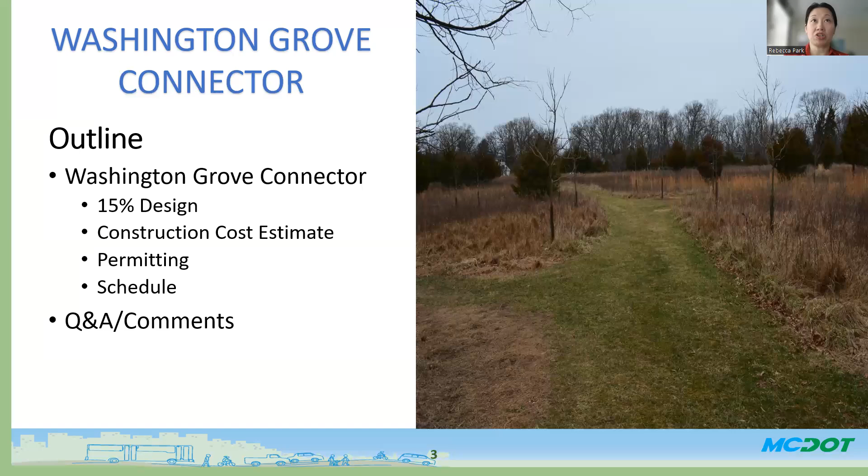That said, here is the outline of tonight's presentation. Mr. Moyasser Mohammed of Shalaria will walk you through the 15% design of the bike trail in detail. Then I will brief you on the construction cost estimate, followed by permitting and project schedule. Then we'll take questions and comments at the end. So now I'll turn it over to Moyasser for the 15% design for the bike trail.

Thank you, Rebecca. I appreciate you. Good evening, everyone. This is Moyasser Mohammed, civil engineer in Shalaria Associates, the project designer and engineer of record for Crabbs Branch Washington Grove Connector Project. And as Rebecca explained, this is the 15% design, and we have here two concepts. One going from Crabbs Branch to Brown Street. As you can see, it's highlighted yellow in the slides here. And that is for bike only, the road is not included.

And here you can see at the bottom, there's two cross sections that show you the 10 feet wide trail, bike and pedestrian. And to the side, there is 2 feet of buffer. So the total width of the trail is 14 feet. The trail is going to have traditional hot mix asphalt pavement with cross slope, combined with porous asphalt with under drain piping for the stormwater management concept, a preliminary concept that we're going to evolve and develop. Next slide, please.

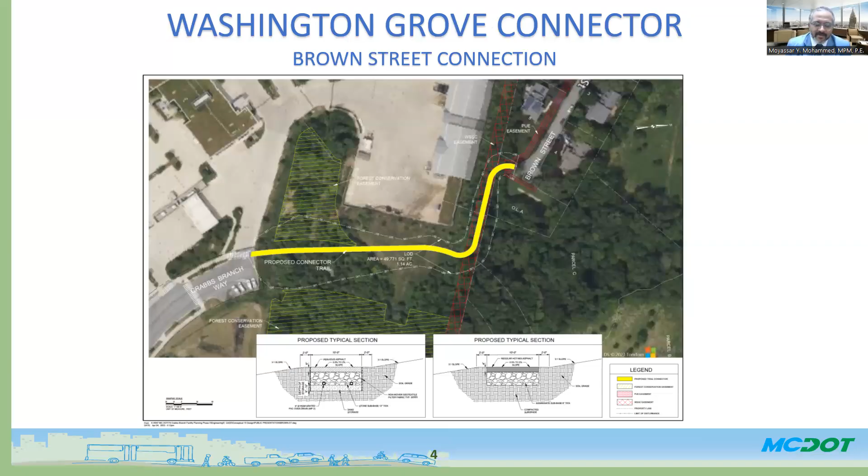As you can see here, this is the site plan for the Crabbs Branch Trail from Crabbs to Brown, and that portion is from the center of Crabbs Branch to the end of Brown Street. And in the top, you see the trail center line with alignment and the grading to the left and right sides as slope.

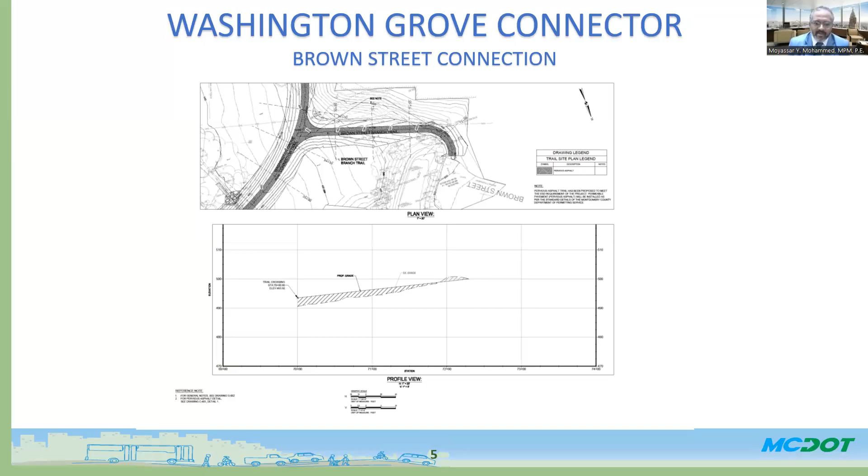And at the bottom, that's the profile, where it shows the majority of that portion of the trail is fill. So we're filling like 5 feet. And when it comes to Brown, there's a short portion of cutting, like 3 feet. So we can have a level, well sloped and smooth trail. Next slide, please.

This is the second concept, which is the full design, the full trail from Crabbs Branch all the way to Amity, including Brown, and it's also highlighted yellow. This is for trail only, and as you can see at the bottom, it's still the same width, 14 feet wide trail zone, 10 feet asphalt pavement, and 2 feet in each side as just empty land or gravel.

We're going to have asphalt pavement with hot mix for part of the trail, and the next part will be porous asphalt with under drain. At this point, we still did not designate which one will be hot mix or which one would be porous asphalt until we come up with our stormwater concept. Next slide, please, Lori. Thanks.

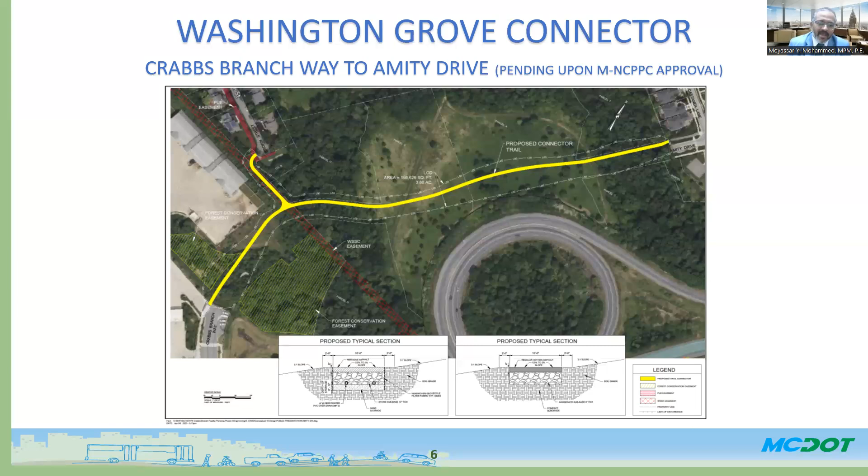Next slide, Lori. Thank you. Here, this is the beginning of Crabbs Branch. We can see where the trail started. There's a difference in terrain, as you can see in the profile, and we're passing over a ravine and storm drain. So in this, we're gonna have to build a box culvert, a culvert with pipes, with head walls at the north and south.

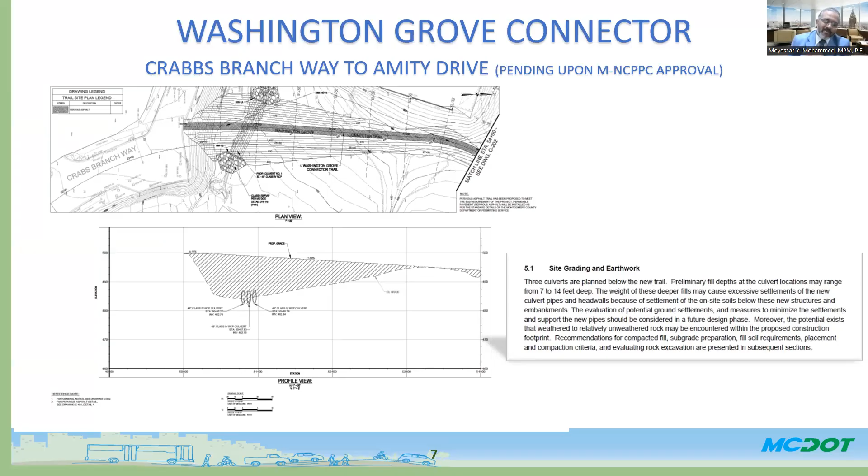So we're gonna need 14 feet of fill to maintain a smooth transition. And in our planning, we need to have a balanced site as much as possible. So where we're cutting, in the beginning here we're filling, and we're gonna reuse the material that we cut. When we go to the next slide, you see where we're gonna cut more. But that would give a balanced site. Lori, yeah, go to the next slide, that's fine.

Oh, yes. Here, the mid portion, the fill becomes less, but we still also have another ravine or storm drain system. We're gonna have to build the same concept, one pipe with 2 head walls, and we'll fill this area with 7 feet of fill. Next slide.

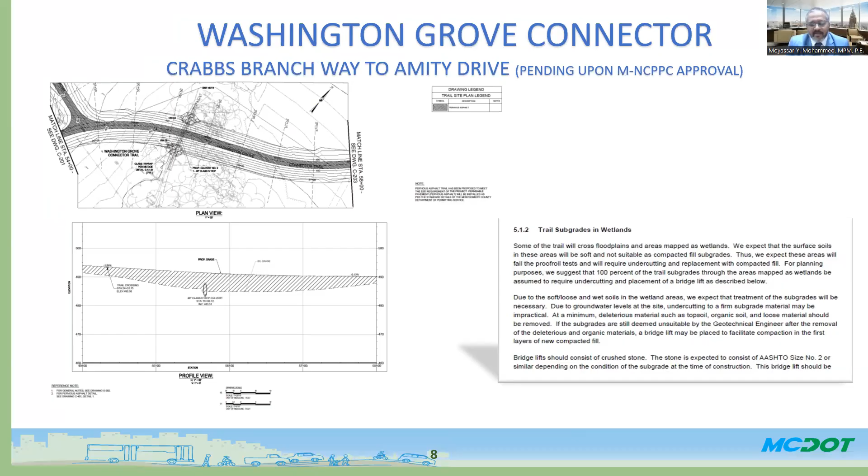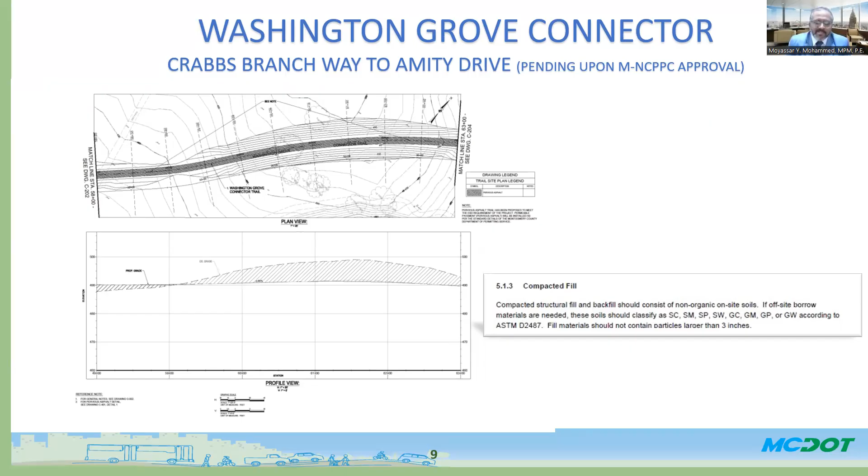Here is where we're gonna have the cut that I mentioned earlier. This area of the site is high terrain, so we're gonna have 7 to 8 feet of cut. That cut material, based on the geotechnical report we've done, is a good material that we could reuse. It's SM and GP material that will be spread on site and reused. Next slide.

This is the end of the portion of Crabbs to Amity, and here also is another third and last ravine where the water will have to seep through. We're gonna put a third head walls pair, and we're gonna have 1 pipe under the trail. And here the fill is 7 to 10 feet in this area. In the majority of the site, we maintain a slope of 3 horizontal, 1 vertical at max. So it's gonna have a smooth transition from the trail to the natural ground at these areas. Next slide, please.

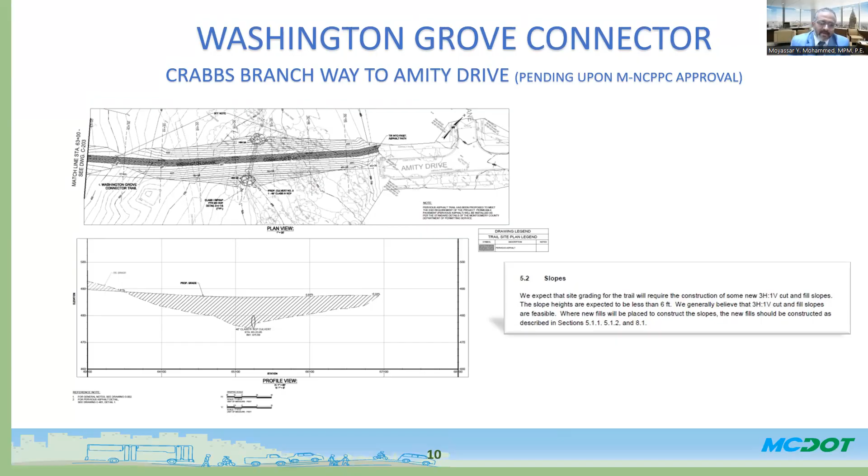Thank you, Moyasser. So here's the construction cost estimate for the bike trails. The construction cost estimate for the bike trail from Crabbs Branch Way to Amity Drive is approximately $3 million, but the portion for Brown Street will cost only around $1 million.

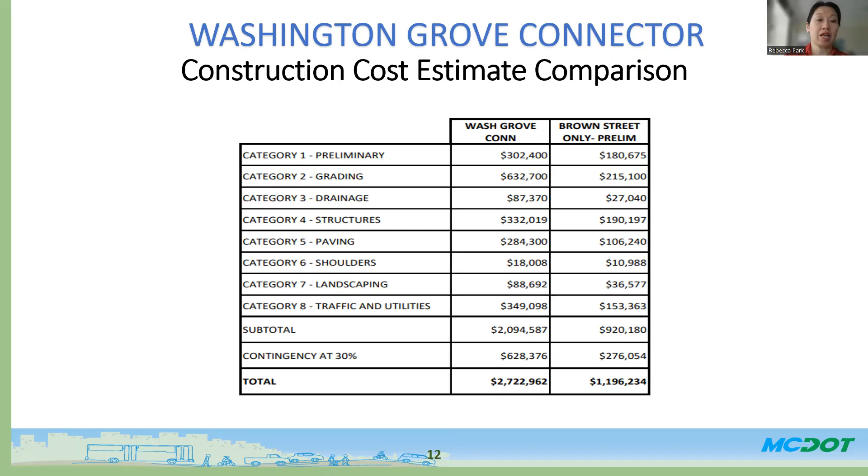Next slide, please. Prior to tonight's presentation, we received a request from the community asking us to clarify the permitting aspect of the project, so I would like to briefly touch upon that. Prior to completion of 35% design, we will have the stormwater management concept reviewed by DPS. We're also going to have an NRI/FSD reviewed and approved by Park and Planning. Because the project impacts parks property, this will have to go through the parks concept review as well. In addition, just like any other CIPs in the county, the project will go through the mandatory referral process at Park and Planning.